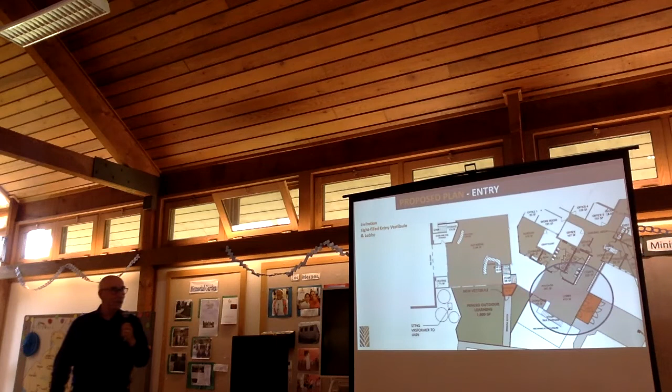by outside temperature. We've created a lobby that is more generous and have moved the coat area. Part of what we have done in reconfiguring the building and programs in the building is important, because right now your preschool is here.

By opening this area up when we move the preschool, it is a straight shot into the gathering space, and we have a straight shot over to where the youth are currently located. So wayfinding in the building

becomes that much easier. It's not really too terribly difficult from this north entry, but trying to get to your conference room, or to the youth program, or to the small chapel area, it's a bit of a challenge for somebody who doesn't know where they're going.

And then we have provided a coat area and 2 new restrooms, each of which will have 5 toilet or toilet-and-urinal fixtures on this level.

We've also made provisions for the donation area, which happens over in this corner of the room and out in the gathering space here. We also have another storage area over here, and that allows us to take the donation area out of this part of the building and relocate it.

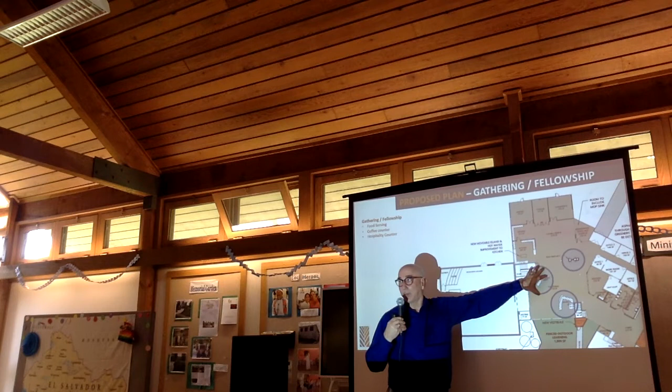Your existing fellowship hall, this space, is 2,500 square feet. The open space we get by using gathering and part of this space, and clearing out the library and the donation area, gives us an open space that is 3,500 square feet.

And it is designed to be incredibly flexible. So when you have need for more gathering, you can expand into the fellowship area. And when you have need for more fellowship, you can expand into the gathering area.

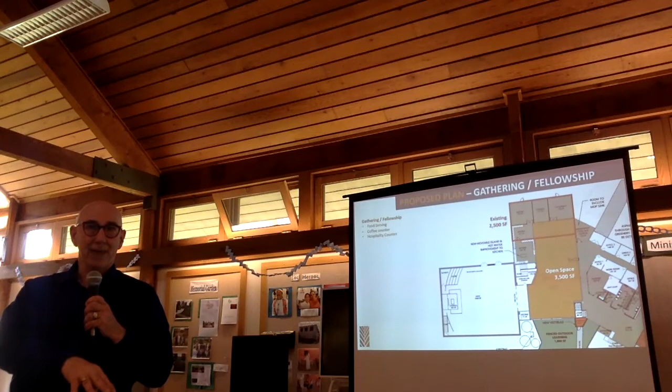It was interesting today - because of COVID, when I started working I usually attend worship, but I had never been to worship because we were in the middle of COVID when I got started. And I think we had a meal here when I was here for the visioning workshop. But

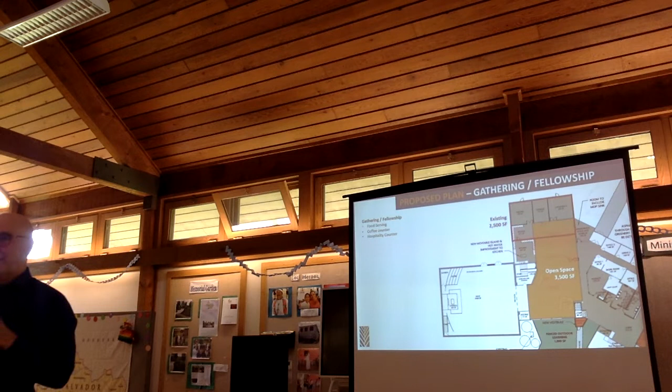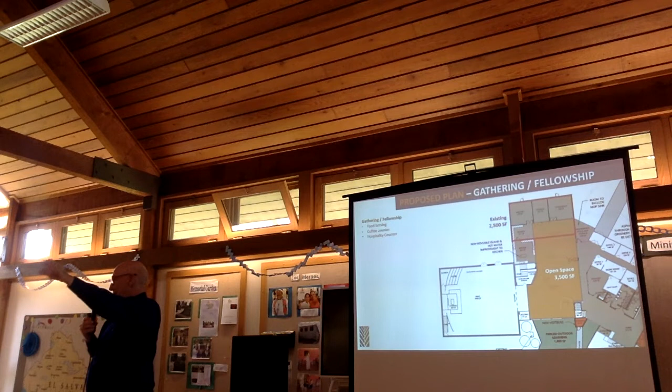it's interesting to watch how you do food, because you really do it in multiple stations. The way this is set up would allow for that same sort of thing to happen in this expanded space, because we've got a beverage bar and a regular kitchen and serving spaces alongside it.

In the far end of this room, we have created 3 areas: a conference room or meeting room in this corner, another conference room and meeting room in this corner that are enclosed, and in between those rooms, a significantly sized storage area for tables and chairs and things needed in either the conference or gathering fellowship spaces. So there's a lot more table and chair storage, and it's a lot more

Hello. That's okay, you're not used to reading plans. I am. I'm not good at directions.

As part of this proposal, there's contemplation that needs more discussion about expanding the kitchen, not only making it bigger but also providing a serving area similar to what you have in this counter, but now as its own space just for serving.

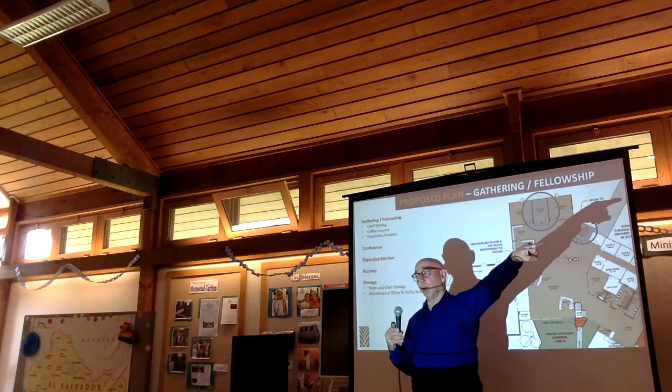Additionally, the small rooms over in your current table and chair storage area have a number of things in them. We're cleaning those out and creating a maintenance storage/office area. When we showed Dan the plans, he actually said he'd like his office to be in that space.

It's a nice size space. You'll have plumbing for being able to do mop and other kinds of cleaning stuff, all in one location over in the corner.

So there's a question, where is the library? That room will not be there. But you've got a lot of other spaces flexible enough to handle book storage. Most libraries still have some books from the past used by congregation members, and those could be in either of the conference meeting rooms or some spaces downstairs. More and more churches are moving toward Wi-Fi access and digital equipment that doesn't need the same maintenance. Every congregation figures that out differently for addressing education needs, and that room becomes part of the fellowship gathering.

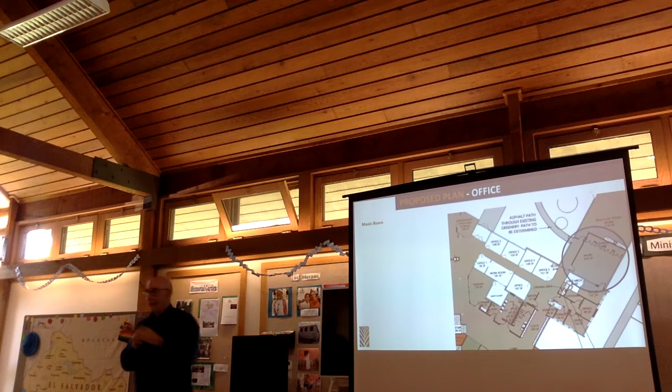For offices, all of the existing offices in this area of the building stay the same. We are moving the music rehearsal area to where the youth office and conference room currently are. We've redirected the corridor to go straight to the youth room and created a music room.

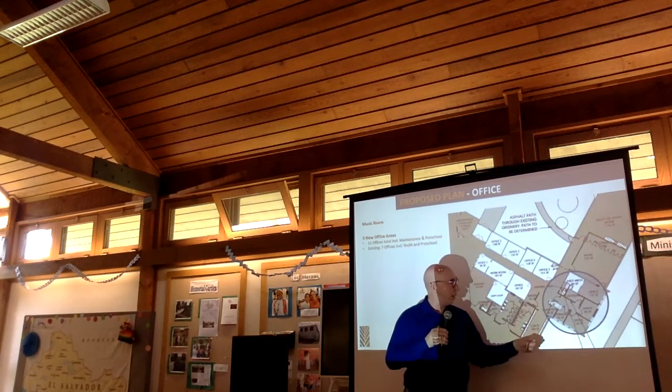And then, where the former entry is, we are taking out the restrooms, which are really small, closing the main entry at that original location, and putting in 3 offices, a custodial area, office storage, and on the corner, a server room or room used for technology storage.

So again, server room, custodial closet. We've got donation storage, some of it in that location. And then, that's supposed to say just storage.

And again, the wayfinding right now is always kind of interesting - when I was picking up plans for the church and dropping them back, there's a drop box over in that corner, even though the office reception is over in this corner. Trying to get from that entry around to find where you're supposed to go in the building is a bit of a challenge. The wayfinding through the building will be much simpler to find offices and get back and forth between the offices in the southeast.

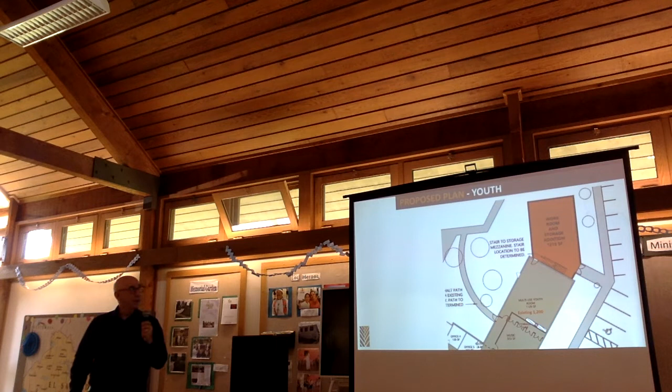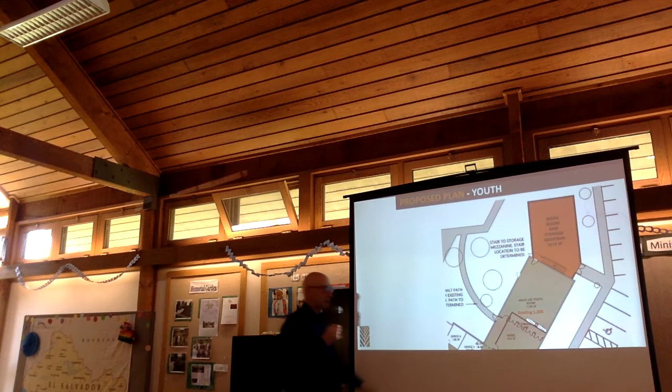Entry. And then finally, in the youth area, we have a workroom and storage addition with a footprint of 1,200 square feet. It has double door access for loading and unloading off of the parking area. It shows one door now, but it may be a double door getting back and forth into the building as needed.

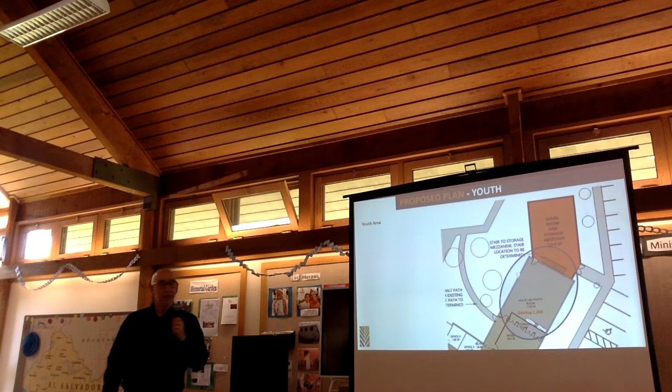And then we also have the youth room, right now designed to be 1,100 square feet. The youth are using a bit of a program to be able to get the music ministry up to the main level.

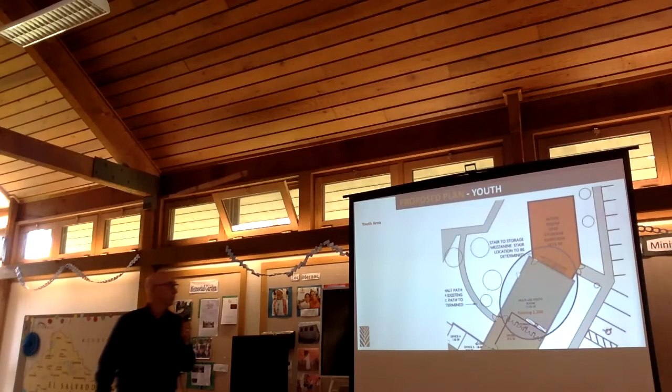So this might be a little dark. Bear with me, I darkened this before so the plans would read. And I'm going to brighten it back up. That should work.

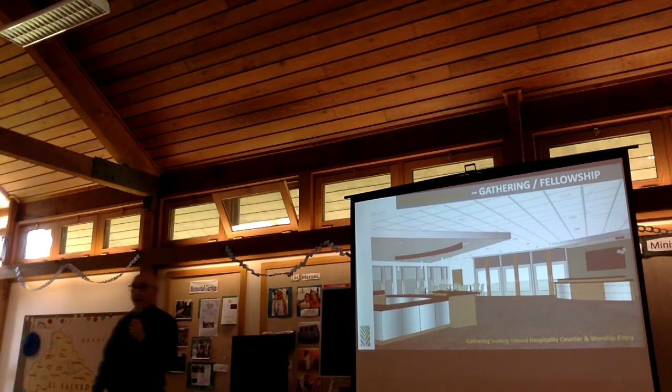Looking more from inside that space, this is the coffee serving area, the worship doors, and the hospitality counter. So we've given this space a facelift. And as part of that, we intend to make your worship doors feel more present. That is, after all, one of the reasons why people come here, is to celebrate worship together.

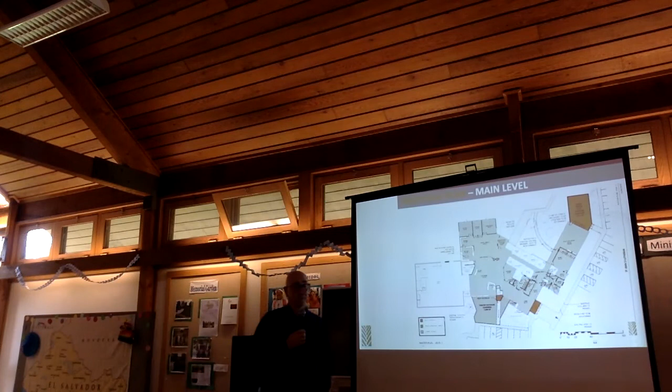Could you use one of these rooms for music? That's certainly possible. I think we probably have to make one of these a little bit bigger to get the music program and the storage in. But that's exactly why we put these things out there, because you're all together on Sunday nights a lot, and at dinner we are together, like in fellowship, and then we kind of split apart in our own teaching. But to have them all in the same wing, it may create some better kind of camaraderie between the two.

Sure, just a thought process. Yeah, no, I mean for those of you who are on the committee, and I'll try to do this too, keep that in mind, because as I said earlier, we've got to solve that junior high issue with the buildings as you take steps moving forward.

So in this mock-up, the dining gathering area right here is much smaller. So for this group right here, meeting with you, we wouldn't fit. So what we'd have to look at is how you represent using a larger space beyond this building, and how that gets configured in a way that you can actually do presentations.

I don't know if you noticed, but we had the wood wall, and I mentioned the table and chair storage was behind that, so it's probably someplace in here. Originally, I showed a screen permanently mounted on that wall that would be visible all through the space. I didn't want to make that decision for you to put a screen on the wall, so I took it off, but I think we'll have opportunity to do that. It's just going to be configured a little bit different. So we do lose space over here, but we gain a fair amount of space right now where donations and the library is, and then there's no barrier to extend further out into the gathering space.

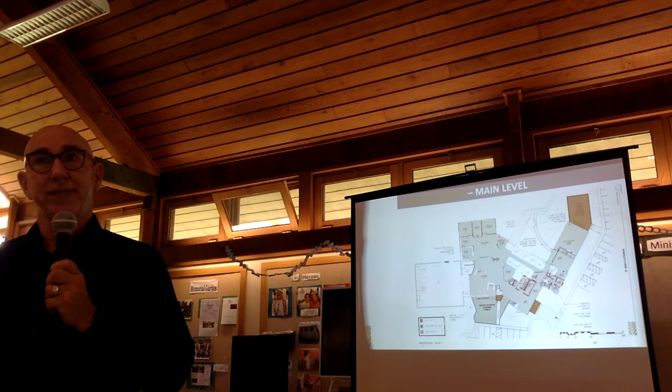And then we still have that one larger, very flexible space, the motor skills room, which is probably the largest education space that remains in the building, and it's anticipated to be very flexible.

One of the things we noticed when the interior team was visiting other churches, we went to 5 churches, and 3 of the churches that Groth Design did had coffee bars. We thought that was kind of cool. We were looking at the back of the gathering space, bringing people together, because we found all our coffee happening in here and people being out there without being aware of it.

My question is, you have the coffee bar right by the elevator and right by the stairway, which seems to also be a travel point between the back entry and the other entry. You have the information desk back where it currently is. What would be the value of taking that coffee bar and switching it with the information desk, so the coffee bar wasn't where people were crossing paths to go in and out? It would be less congested and more welcoming for people to go sit by the fireplace or wherever the window is. Would that be a possibility?

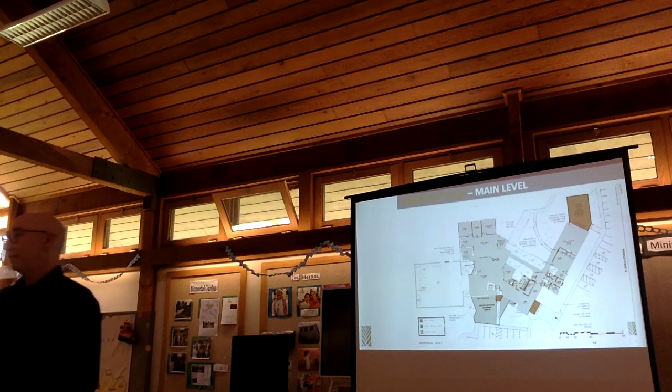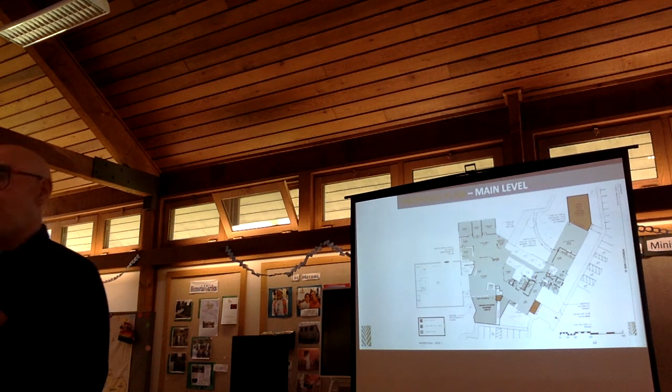Well, so I'm going to make note of the things that were discussed, so I can go back and revisit them.

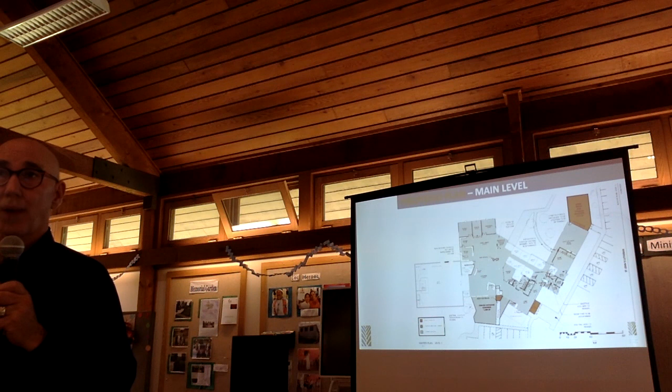So the access to the new workroom would primarily be through the youth room? Am I reading that right? From the building, yes, because we need an access point and there's no other way to get back and forth through there. My guess is that won't be happening during programming. There is also the ability to go outside and into that room directly.

I probably missed this, what was the purpose of the workroom? It's primarily to collect things needed for maintenance in the church building and for storage that doesn't get used all the time. That space is 1,200 square feet in footprint, but we've priced it with the potential of putting in a mezzanine, which could double that square footage for storage.

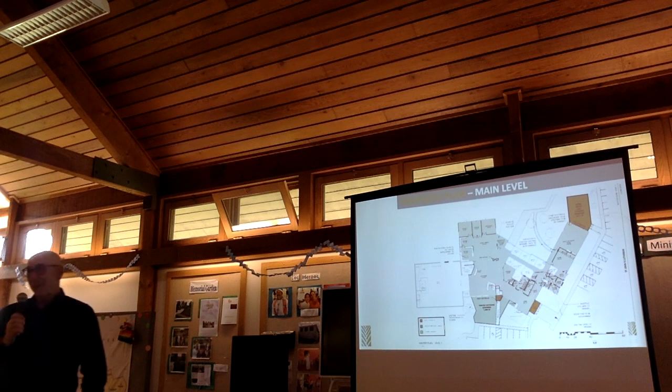Thank you for the opportunity of serving the congregation and for having me here this morning. Thanks to the people who provided lunch and worship. It's nice working with you. I didn't get a chance because of COVID until now, but thank you for having me here today.